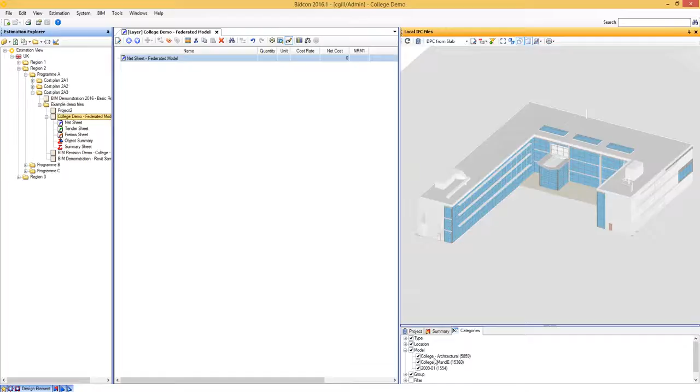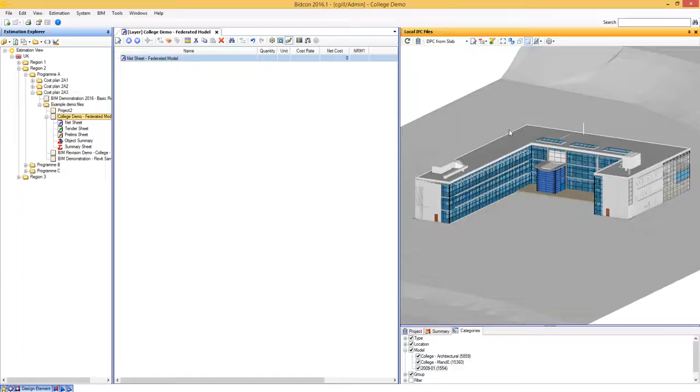I'm going to center this around 3 IFC models. We've got a federated model, courtesy of the advanced sample file in Revit. If I step into transparent mode for a moment, you can see when I click on, for example, the structural model, we can see all of the elements of those that are highlighted. So let's go back into solid mode and stop highlighting anything.

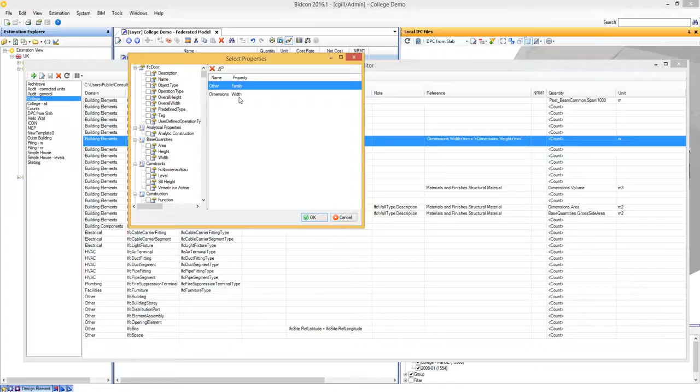To show you very briefly using the Takeoff editor, I can have a whole host of Takeoff templates, and these determine exactly how the line items are going to be produced and associated with the objects in the model. We choose the kind of quantities, where we get the dimensions from. We also choose how items are merged together, so what information is used to merge those items together, so we don't have hundreds of lines of doors, for example. We know we only have a few different lines depending on the types.

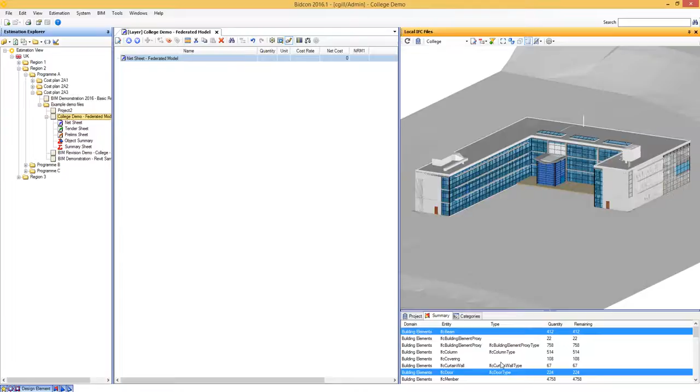So I'm going to take off only selected items. I'm going to do that by holding down Control and selecting a few different IFC entities, and effectively it's selected 1300 or so items. Let's take off only the selected items.

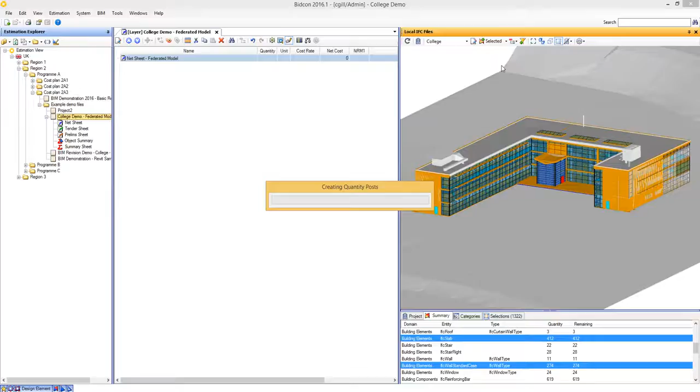Bidcon has created quantity posts. It's warned me about some items that couldn't be taken off because they've been modeled incorrectly. We can access those another time. But for now, I'll show you the link.

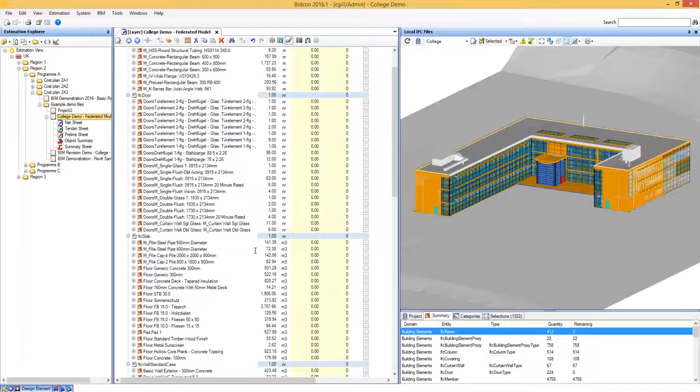So if I want to show you items that have been merged together, let's look at my piles. Step into transparent mode, and we can see those are below the surface. Same kind of thing for the pile caps and the floors. So we can see that the upper level floors have been merged together into one quantity. We'll price them together. We can split them by level if we wanted to.

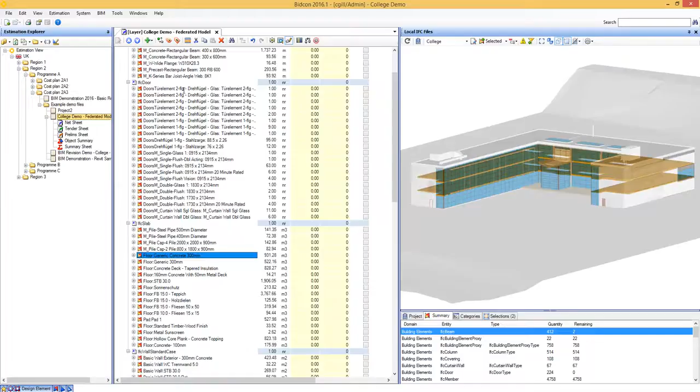Look at my doors. I can see we've got 95 of a particular type over here, 63 of a particular type over here, and you get the picture. They're merged together to make it easier to cost, but this information carries its way through the IFC file, so when you're using it as a single source of information, it's all there.

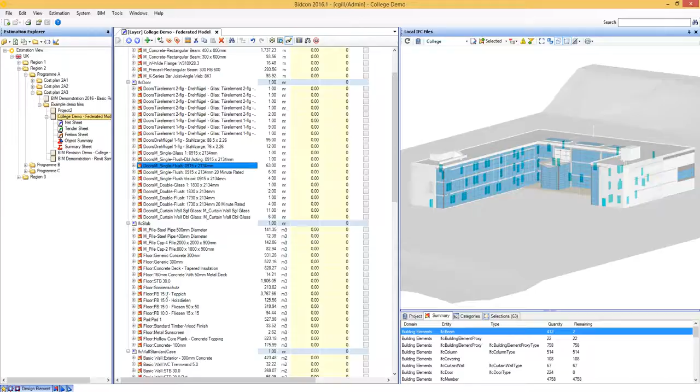We'll find items that haven't been modeled. Say for example, let's take our floor again. So as this ground floor, for example, we might want the DPC quantified. We can manually access the information, the property information for that floor. Let's look at the dimensions. So we can see the perimeter, we can see the thickness, and we can see the area.

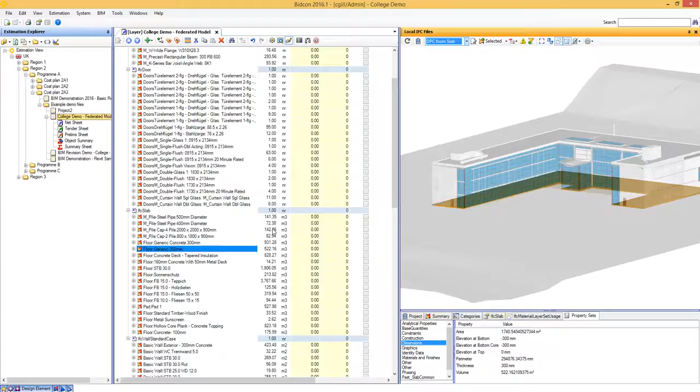So all of those built together will give us a good idea of the DPC needed. So using my Takeoff template, I've created a formula using those dimensions to get the right quantity, the right area of DPC needed, and I can manually add a line item. Let's call this DPC, give it a unit, meter squared. Let's move it up just below the floor so they're all together.

But rather than entering the number in manually, I actually want to link to those quantities. Bidcon won't let you take an object off more than once because that causes duplication. So in this case, rather than create quantity posts, we're actually going to apply the quantities.

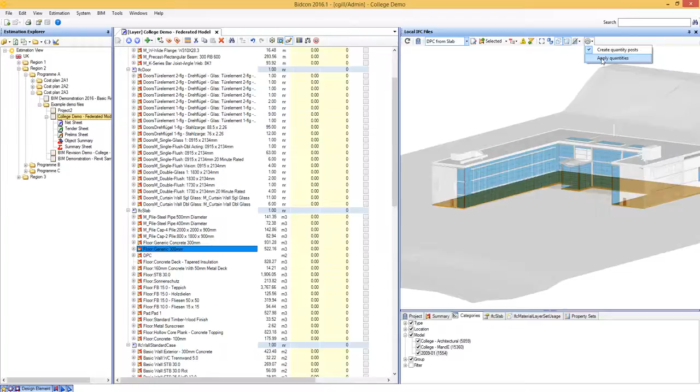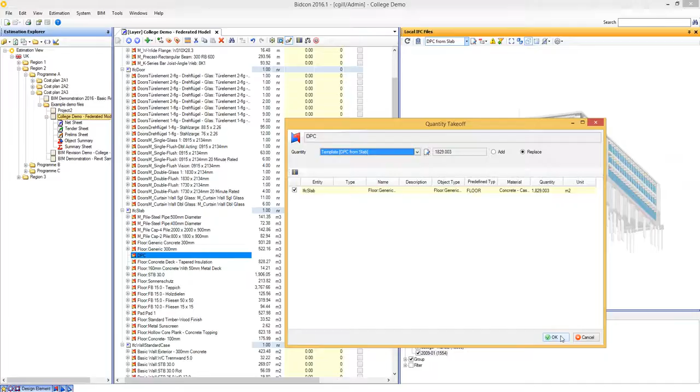So going from underneath the model, very easy to see the floor. Hold down Control and drag the floor onto my DPC line item. Bidcon gives me the option to use a number of properties as the dimension information. I'm going to use my template, and there we go. We can see 1,829 meters squared of DPC is needed, and there we go. That DPC is linked to the floor.

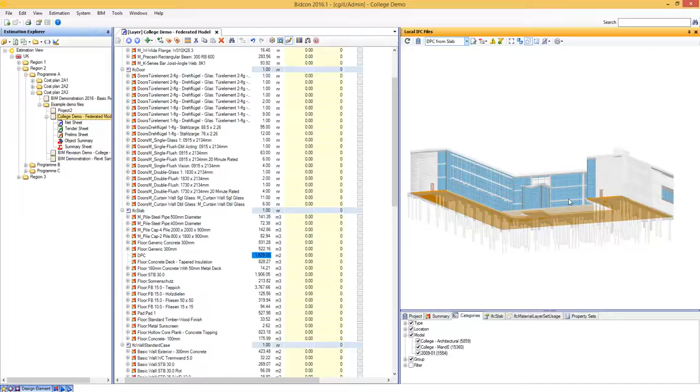Okay, so that's one example of how we would create quantities for objects that haven't been modeled, but we can access the information from elsewhere. One other thing we might want to do is add model revisions.

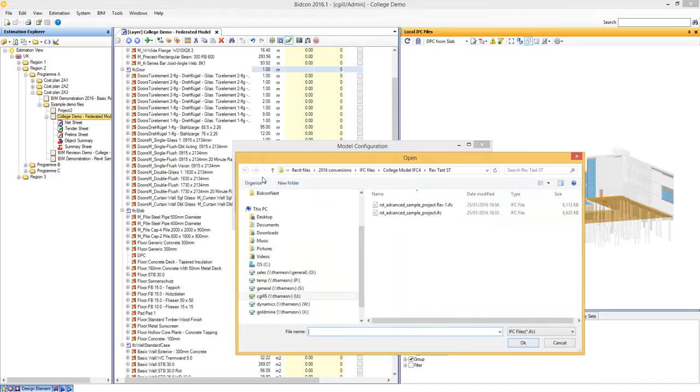So if we take the structural model again, add a revision. I'm going to use one where a simple change has been made, but it's quite a small change and it's had a knock-on effect. So let's import that model. We're going to import only the structural model.

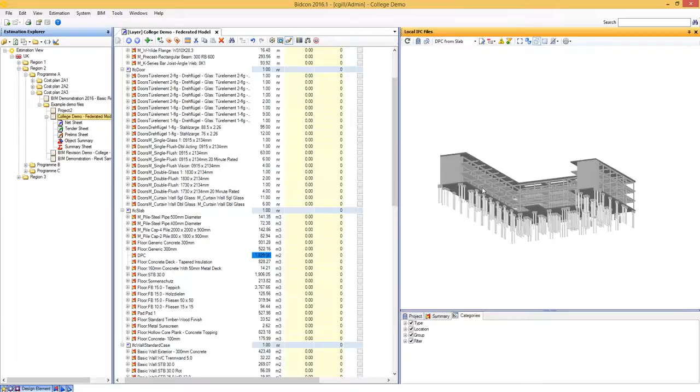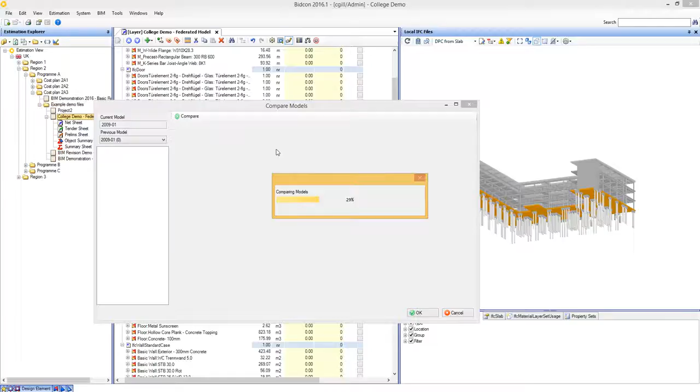If we take a look at all the items that are linked to it, they still remain linked, even though it's a different model. And we can run a comparison. I'm going to compare the two models, and we'll see that even though I stated there's been one small change, it's had quite a knock-on effect.

So if I filter only for modified items, let's take a look at these pile caps, for example, and the modification to those, well, the only modification to those is the host. The floor has changed. This ground floor has changed. Now if I filter only for the floor,

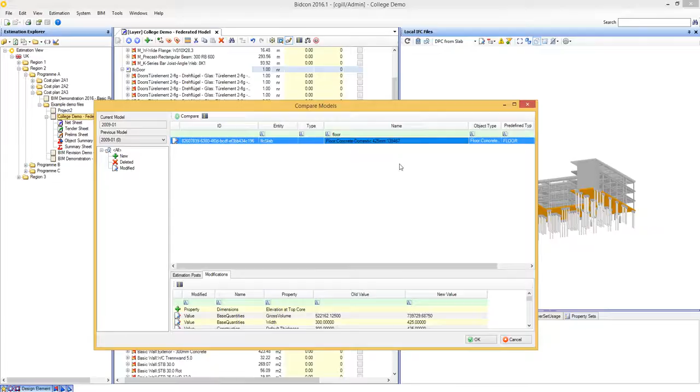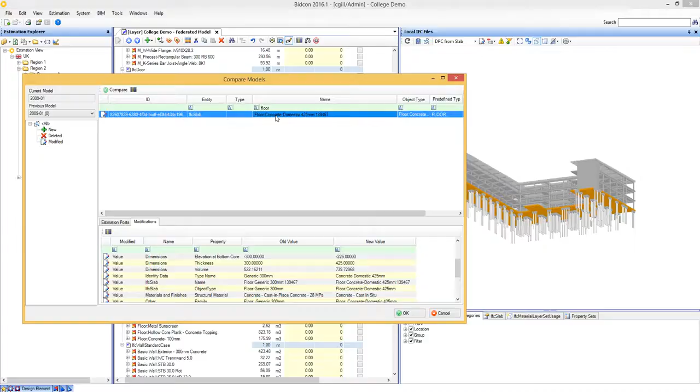we can see there's been quite a lot of changes made to the floor. Primarily the name and the thickness, which is why we've had lots of replacements of rebar, and the host of course has changed for those pile caps. You can see via the model the floor's been selected, and we can now have a look at the effect of those changes.

The volume of slab has now been changed, so it's not 522 anymore. Let's remove that link and take the volume off again. So let's take dimensions and volume. We can see we now have just under 740 cubic meters.

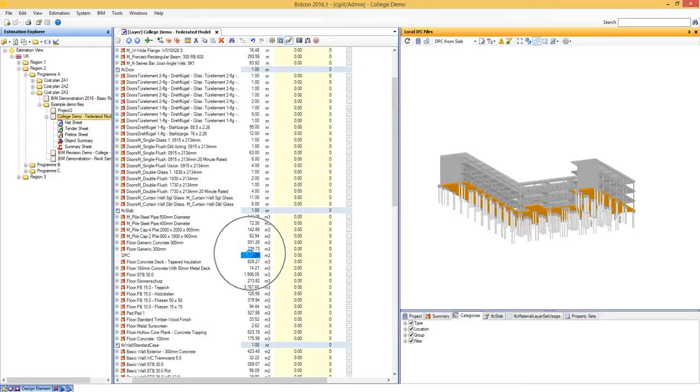Now the DPC will have changed ever so slightly as well. Even though the area hasn't changed, the thickness of that slab has changed. So we haven't got 1,829 anymore. So let's zero that to remove the link. Take it off, or rather apply the quantity posting again. Take that same formula from the template, and we can see by around 35 square meters the DPC has increased.

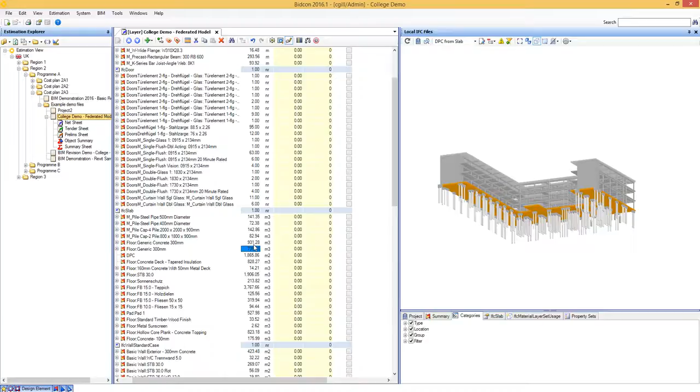Okay, in later examples we'll show you how this process can be done automatically. This highlights here that the change can be tracked down, and even though the change is made, everything is linked to the model, and of course the costs and quantities will have increased accordingly, allowing you to track your revisions and manage the changes that need to be made to the cost plan.